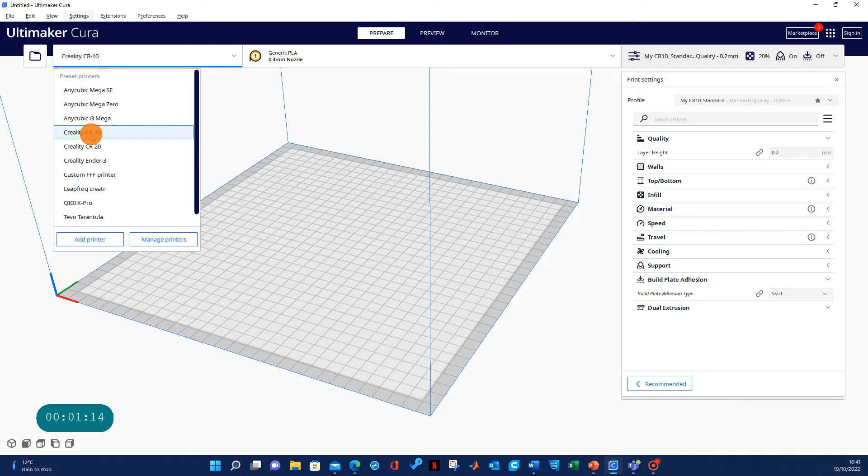Okay, so if we go to Cura, which I've already opened. So this is my Cura window. My 3D printer that I'm going to use today for this file would be my Creality CR10. Again, there are three of these in the CNC workshop in DKIT. And I'm going to import my file, the one from the previous video, OWC blade EG, and we're going to bring that in. Okay, so that was an STL file that we've imported.

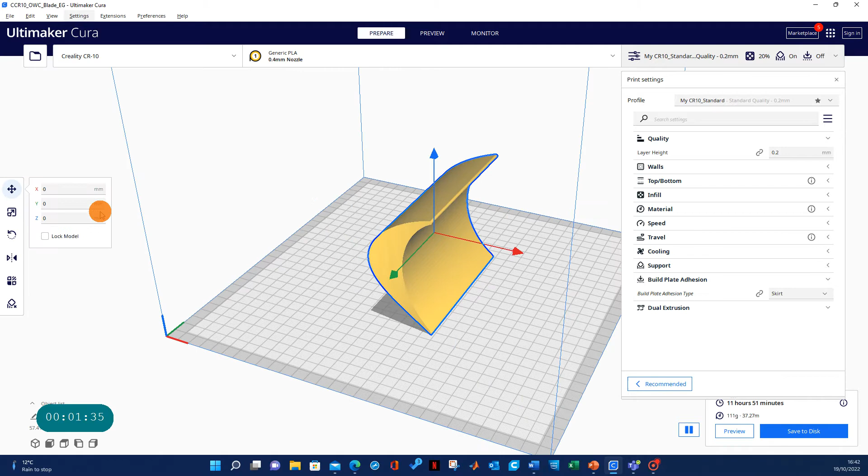And again, because of the way I drew that, it has brought it in on its side. So I'm just going to move it so that it's standing on the bottom of the blade. Okay, that's actually the wrong way. I've turned it upside down. I could print it that way, but I prefer to do it this way. So I don't need to do anything else with the actual geometry. I don't need to scale it. I don't need to move it. So we can go up and look at our material. It's PLA, 0.4mm nozzle, which is the standard, so that's fine.

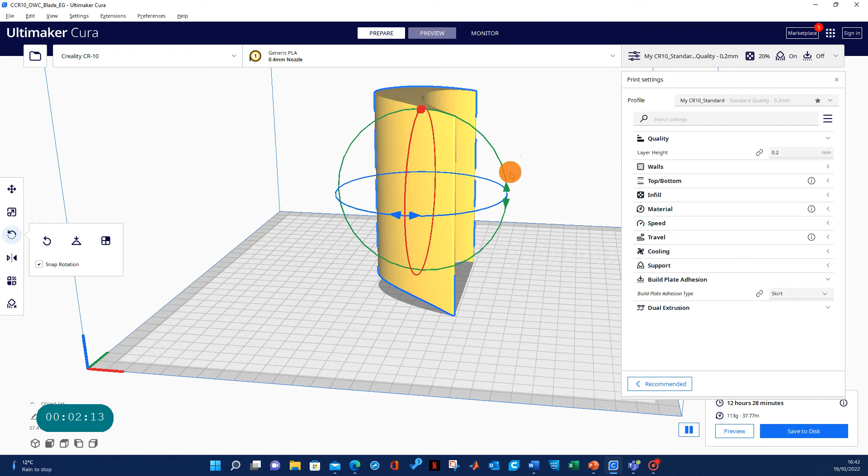I'm going to go to preview so you can see the layers. Okay, so you can see it's printing support material down here. And I can even zoom down for you so you can see the support material. Okay, and move on up to the layers.

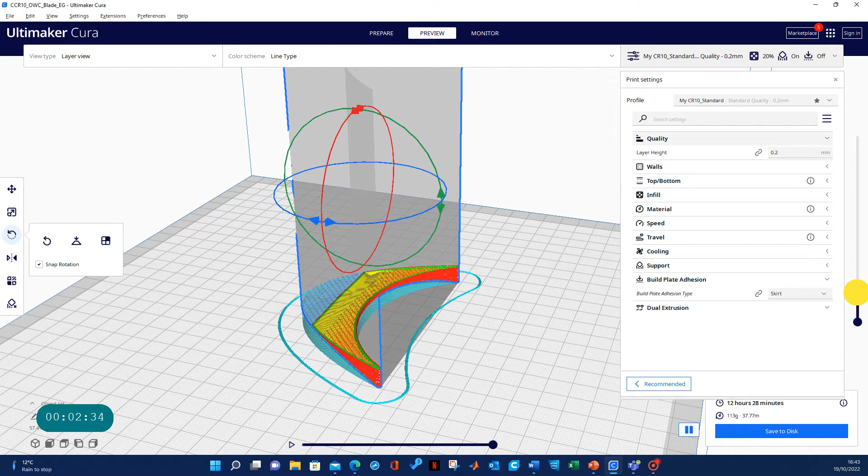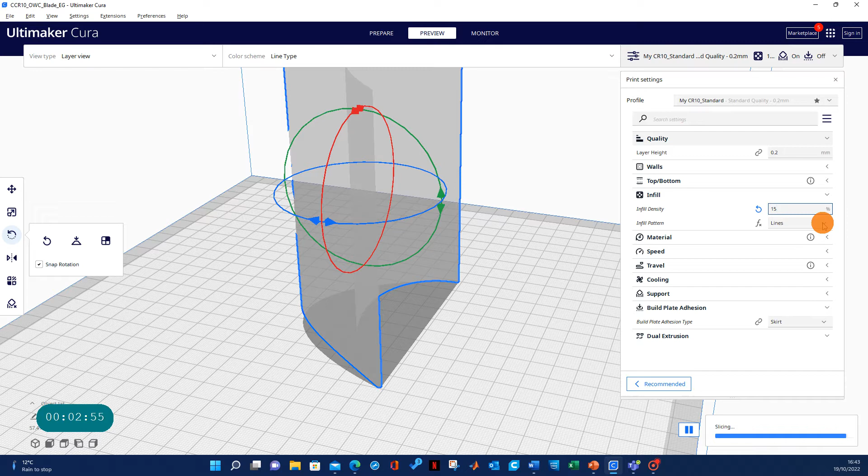So I'll just check what infill I have. If we go to the infill, it's 20%. I mean, 20% is probably fine. I might reduce it to 15 just to make it a little quicker, and the time will come up down here. I'm going to leave it on an infill pattern of lines. Yeah, that's what my profile is set up to print. So that's printing 100 grams of material. It's taking 11 hours, 27 minutes.

And I'll just look at the layers. So a layer height of 0.2, which is standard enough. Walls, just to see how many wall lines we have. We should have 3, and we can check that by zooming in. So we have 2 inner, which are in green, and our outer in red. So we have 3. Our top and bottom layers we can just check. We have 4 in each, which is fine. You probably need those 4, especially for the roof.

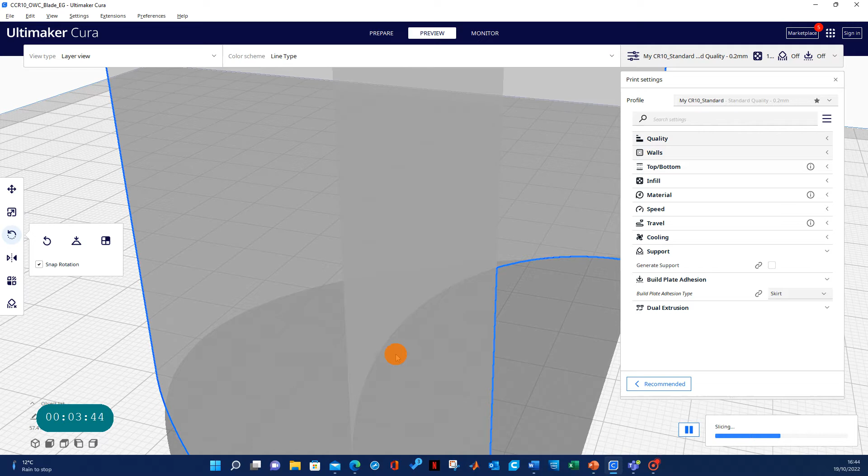Support we have turned on, but I'll just show you what settings are in there. So if I turn off support, you'll see the blue lines down here will disappear. Okay, so that's not going to print. Right, it's printing in thin air. So I'm going to turn on support. Okay.

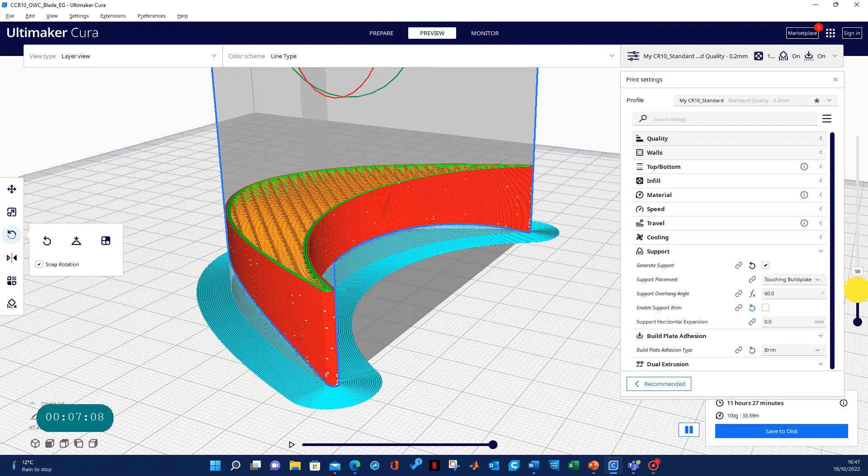You can see that mine is set to touching build plate, so we print support directly under a part. 60 is the overhang, so that's 60 to the vertical axis or 30 to the horizontal it will print before it needs support. You can adjust that if you wanted more support. 50 is sometimes good, but in this part it won't really matter. We can enable support brim, and it should print a brim for the support. So in here you can see the support just has a line here.

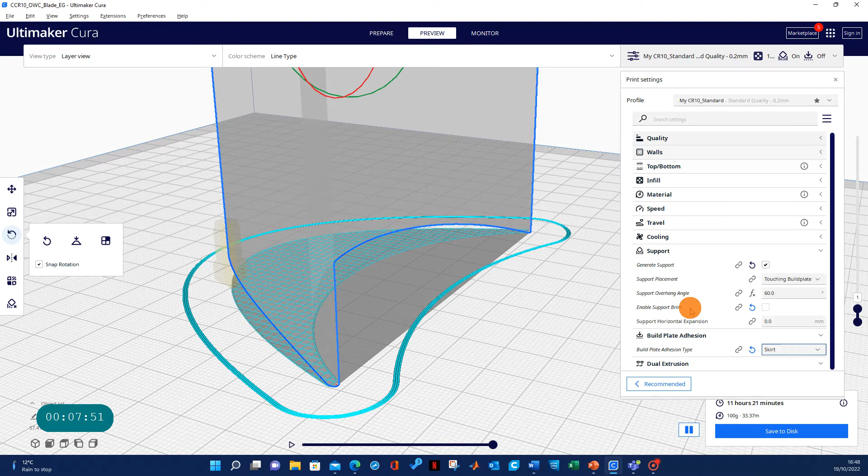So if we weren't printing with a brim, if I turn off the brim and just go back to skirt, for example, okay, now you can see the support material in light blue along with the skirt here. What's going to happen there is that support material and even the first layer of the part may well peel off the build plate. So to give them extra adhesion, you have two options. One, you can enable brim support, and it's going to print a brim on the inside, internal to the support.

Okay, which is now done. And the other option we have is to turn on the brim here, and you'll see it'll print now on the outside of this. You probably don't need both, but I'm going to leave both on because I want the extra support around here. You can adjust the width or the amount of the lines, whichever you want to adjust. That will adjust the number of lines here.

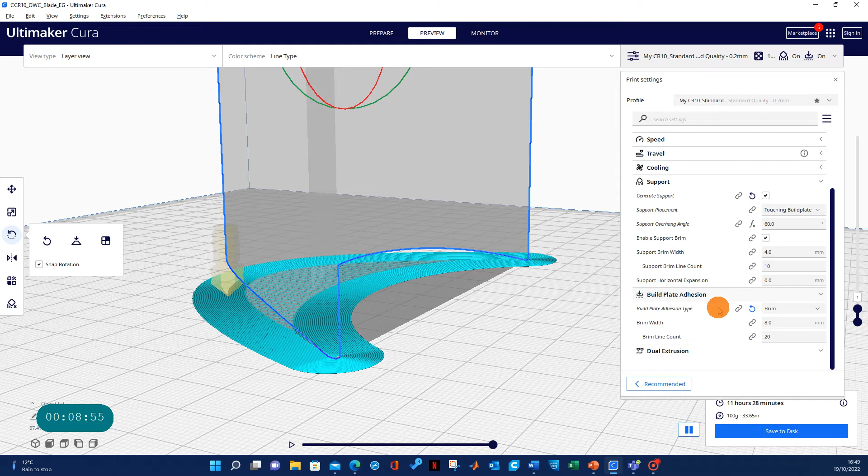On the inside, it's in here in support, and down under build plate adhesion, you can adjust the brims on the outside. Again, you have to turn on the visibility if you haven't got it on already. So you can go down here and look at brim width, brim line count, and that will turn those on for you. I have that set to 20, which seems a bit excessive, so let's make that 10, and let's make this one more like 8.

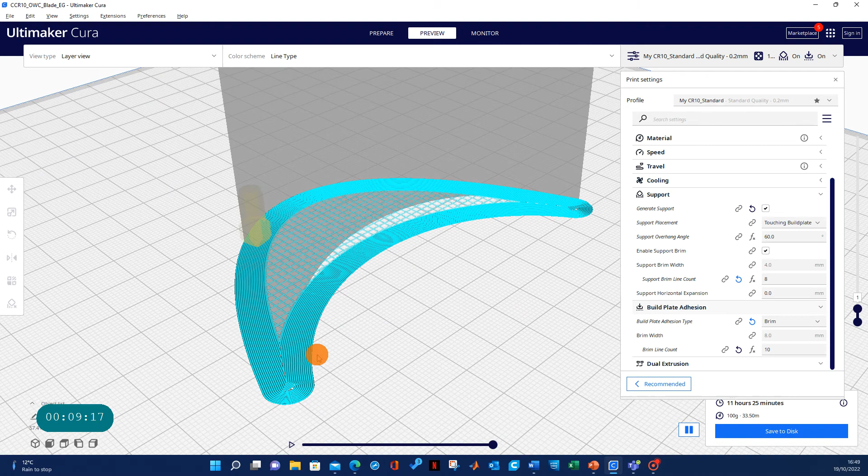Okay, you can play around with these settings, see what works for a particular part or a particular printer as well. So I think that's okay. So I'm going to turn back on all the layers. Okay, so I don't think there's anything else we really need to adjust there. We just turn back on all of this.

So we have 100 grams and we have 11 hours. We can play with our speed a little bit. I'm just going to have to turn on visibility again for all the different ones. So infill speed, wall speed, outer and inner. We'll go with support speed. There's a few others we need to look at. Travel speed, initial layer speed. Nothing else we need too much in there, I think.

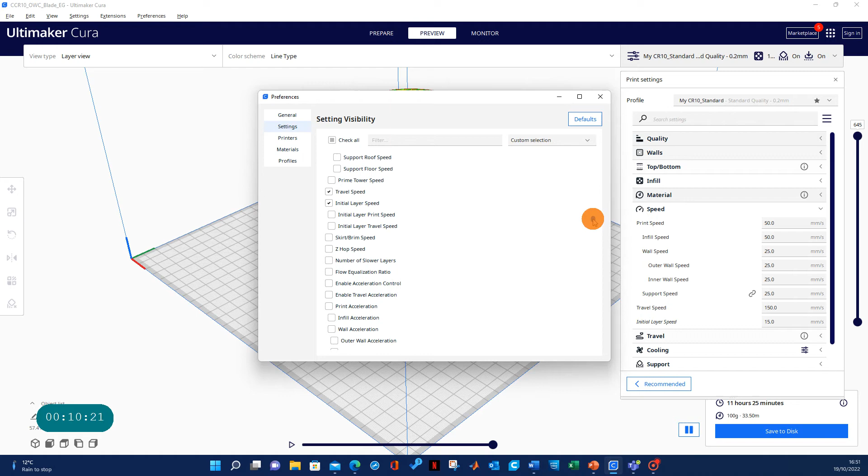Okay, all of these settings you can adjust as you get more experienced at them. But if I was to enable these, you'll see I have some of these settings actually set. But for you guys, I'll copy over a file and I'll share a file with you, and when you open that file as a project, all of my settings will come through to you as well.

So I'm looking here, some of these seem a bit low. Our wall speed is probably a bit low. I think our outer one we can probably get away with 35. Inner one we can go higher, 40 or 45 even. We can go with support speed. We can leave that relatively slow if you want.

Infill speed is 50. You could even go a little bit with that, but I'll leave it at 50 for now. So I'm down an hour roughly. Travel speed, initial layer is 15. That's probably 20 or 25 is good enough for that.

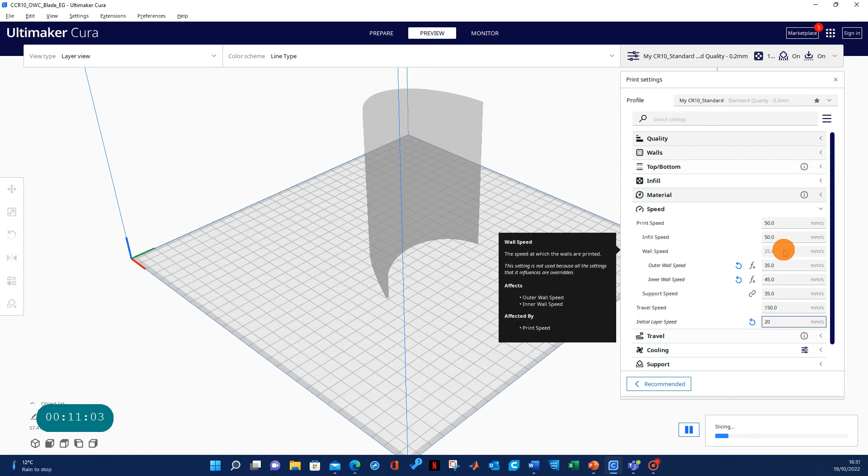If I move this back up a little bit and you hover over it, you can see your breakdown of your print. So the infill is 30%, and then the inner walls and outer walls are 24 and 15%. Okay, so you can see there's no real point in adjusting the other speeds if you're trying to make your print faster. It's your infill and your inner walls and outer walls that are taking up your time.

So we could make the infill or the inner walls a little bit faster. So we can go back up and just check what we had. Our infill was 50 and our inner walls were 45. We're probably not going to go any faster than those. So if you need the part to print faster, you might need to reduce your infill percentage, for example, if you can. You could reduce the number of walls, but that'll weaken your part.

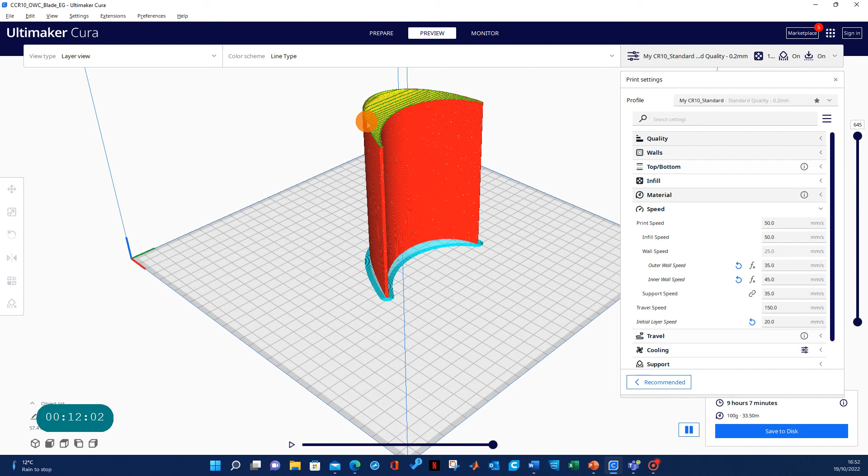The only other option that you have available is to go back up here and consider changing this to a different nozzle, right? So you would have to go into your printer settings, change this, say, to 0.8, for example, and then you would see that your part will print a lot faster. Each layer will print in about half the time, and you can increase the layer height. You can double it. So again, you'll print twice as fast that way. So you should print in about a quarter of the time, and you would need to obviously change the physical nozzle on your printer to match that.

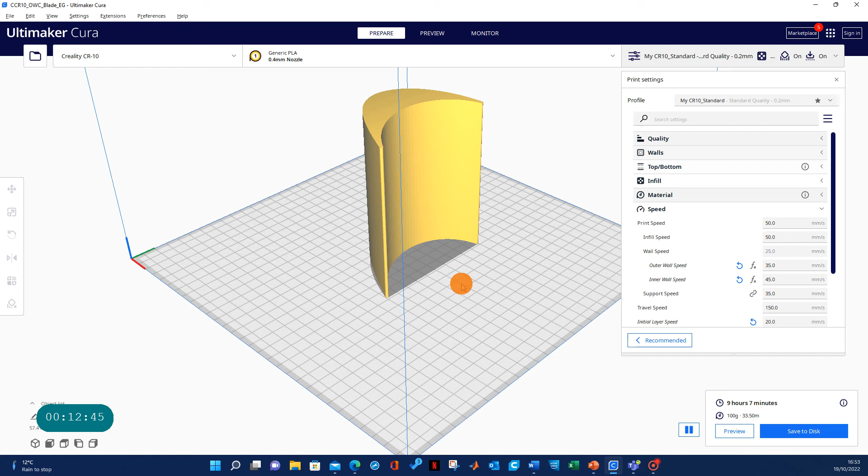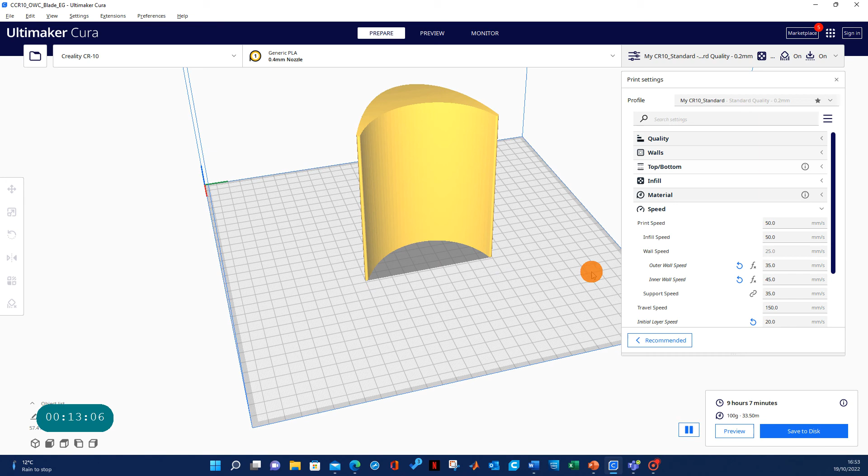So if you are printing large parts, and especially if they're parts like this, where they're cylindrical, the cross-section is the same at all heights, you don't really need a fine nozzle on this part. So rather than having a part that's going to take days to print, we could change the nozzle to a 0.8, and that would go much faster. Okay, but that's for another video.

So for now, that's my file, and all I'm going to do is save that to the disk. I'm going to leave it called the default name, which is CCR10, and then the name of my part, and it'll be a Gcode. So once you have that saved to your desktop or your folder, you then need to go to the printers, get the SD card for that particular printer, and put it into your laptop.

If you don't have an SD slot, you'll need to get a little adapter. We have them in the workshop beside the printers, a little adapter for plugging an SD card into a USB slot. So you'll need those for the desktops at DKT. And you copy over your file onto that, and then you go to the printer and select your file, and I'll show you that in the next video. I'll give you an overview of the menu on our printers, and then how to print the actual file.